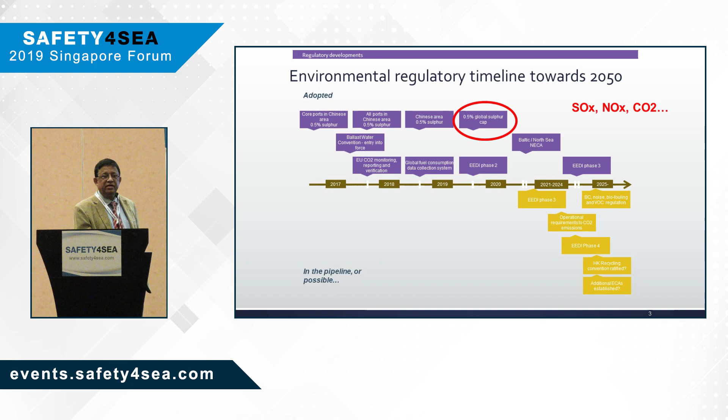So this is the timeline for basically three emissions: SOx, NOx, and CO2. For 2020, let me touch on that. The fuel options we have are basically high sulfur fuel oil with scrubber, or MGO, MDO, or alternative fuels, right?

Each of them has pros and cons. Nothing is really problem-free; one way or other, you have a problem. If you go for heavy fuel oil, even compliant fuel, availability is one thing, and quality would be another. And the price of low sulfur fuel could be pretty high, though it's anyone's guess.

A lot of rumor is going on. Scrubber availability is a question, and in the yard, I think they are fully booked more or less in China. And LNG, availability was a question mark, but it didn't fly because the retrofit option is not very lucrative.

So how does it look? LNG is not very attractive because you have the existing tanks that will become redundant, and adding a new tank increases the weight of the ship. So it didn't fly. But looking forward, by 2030 LNG will most likely come in and really capture the market, especially with new builds, slowly replacing the old ones.

The funny thing is, as you see in the graph, the demand for high sulfur fuel will drop, but it will most likely inch back up because a lot of people are still hesitating whether to go for a scrubber, but they eventually will.

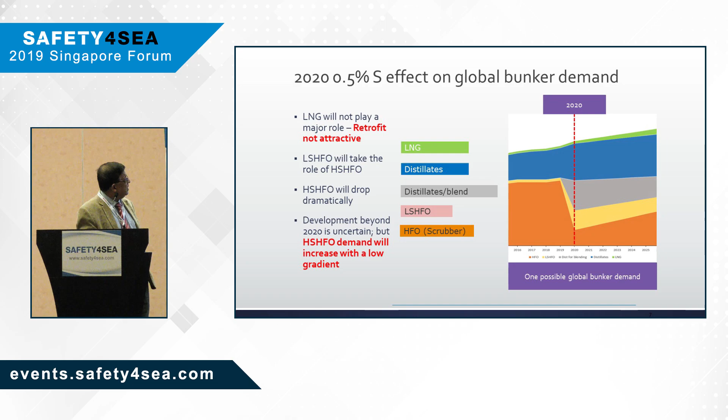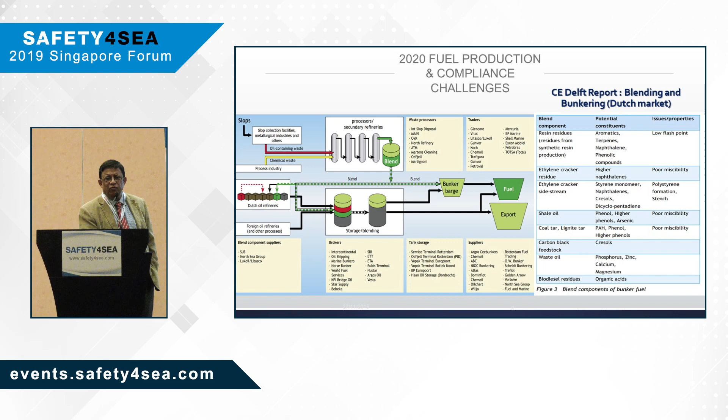Problem with low sulfur fuel will be the cutter stock, used to lower viscosity and sulfur content—that causes problems. This is from the Delft report; it says where the cutter stock comes from, and the most dangerous one is chemical waste coming from industry.

So refiners will be supplying this low sulfur fuel, and so will traders. Refiners do it by hydrotreating or blending, and that quality will most likely be all right. But the one you buy from the trader, you need to watch out for, because the blending may not be perfect. So you really have to watch out.

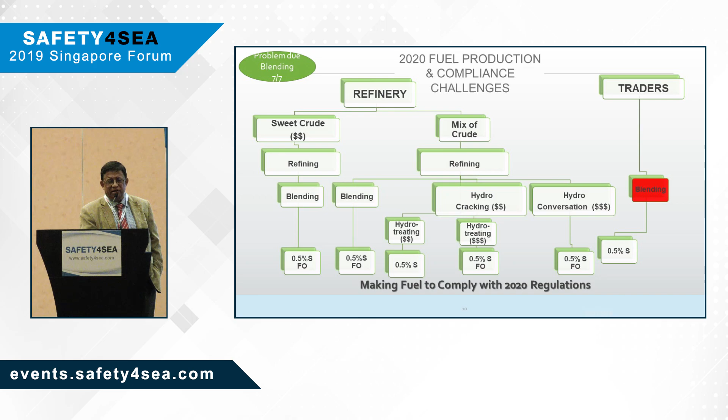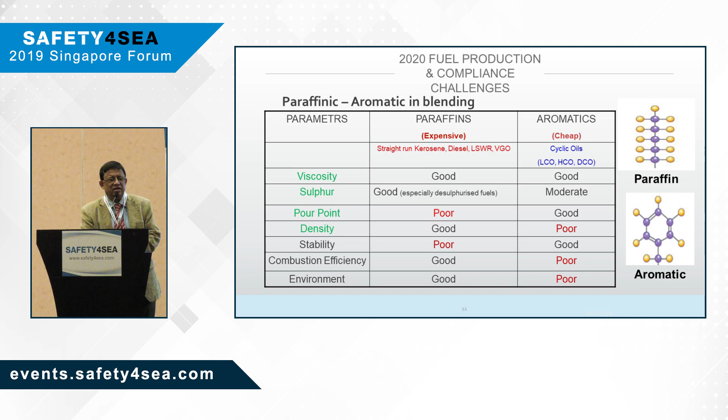There will be predominantly paraffinic-based or aromatic-based fuel coming in, and that will tell you what sort of fuel you're getting and how you need to prepare for it. This is a bit different from what you have right now—it's a very homogeneous fuel, right?

The publicly available specification came in from ISO. Basically it's a guideline, there's no standard. They warn you about compatibility—that means when you mix the fuel, stability can cause it to separate by itself, and there's viscosity. These are the concerns.

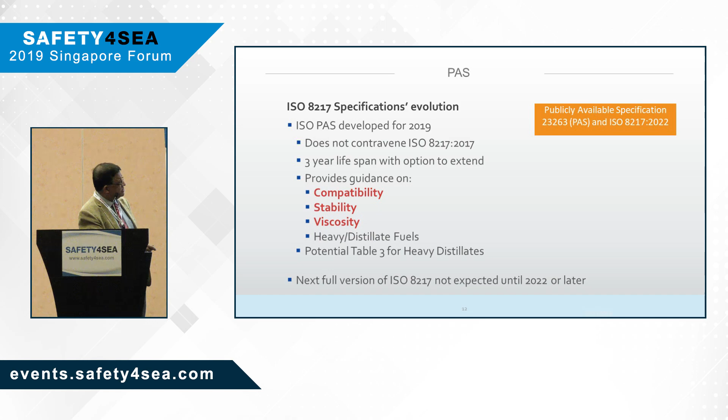So far we have seen some areas of concern with certain things: some cat fines, some pour points, and all this.

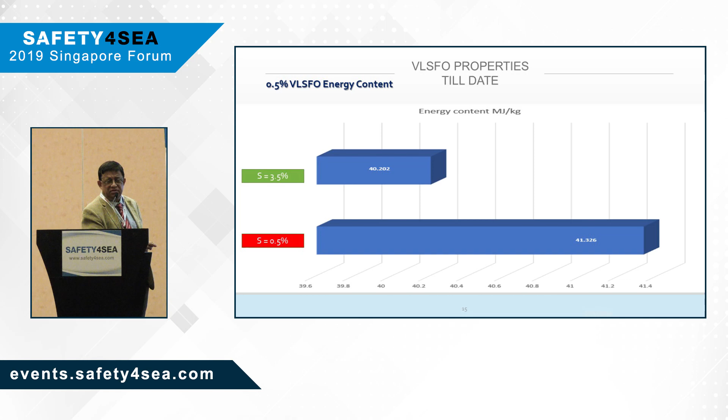The good thing is low sulfur actually means more hydrocarbon—you get more energy, more megajoules per kilogram of fuel. But then again, there are concerns about compatibility, stability, and viscosity. Main engine and auxiliary engine will all be affected because of combustibility of this kind of fuel, whether paraffinic or aromatic, due to viscosity. And lubrication is another thing to watch out for.

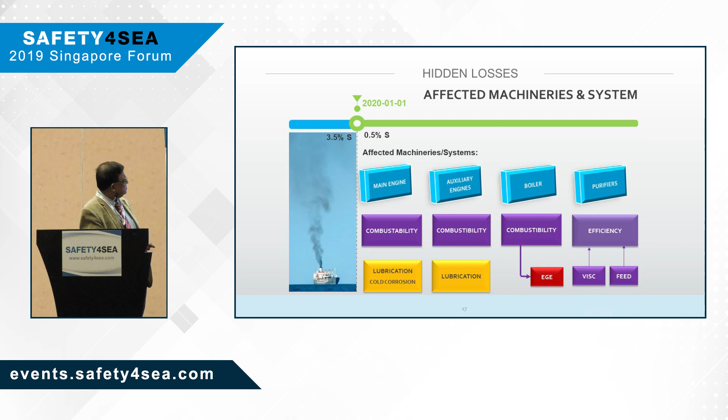So in summary: main engine and auxiliary engine will have combustibility problems because the viscosity is too low, affecting penetration and atomization. That means there will be a lot of hidden losses—you'll see fuel consumption go up. There will be a lot of leakage from the plunger and barrel because of low viscosity, and that will contribute to increased consumption.

But the good thing, again, is that sulfur content will be low and hydrocarbon will be more, so you have higher energy content. So it's a mix of good and bad for 2020 fuel.

Another issue: if you don't need to heat the fuel oil because the viscosity is too low, then what are you going to do with the exhaust gas economizer? It becomes redundant. How are you going to dump the live steam? Some say they'll dump it to the drain cooler—please don't do that, it will simply bloat the drain cooler. It's not meant for that, right?

The point is, all engines have been designed for high viscosity fuel, and the injection viscosity is supposed to be maintained between 12 to 18 CST. But if the viscosity of the fuel you're getting is around 8, 10, or 15 CST—there's no lower cap on the CST—are you going to change the injector nozzles or the fuel pump plunger and barrel? You could, but the next batch of fuel could again be higher viscosity, and again you'd have to heat it up to bring down the injection viscosity.

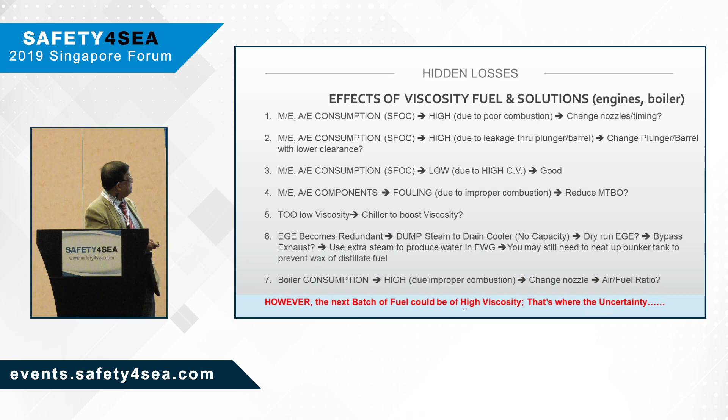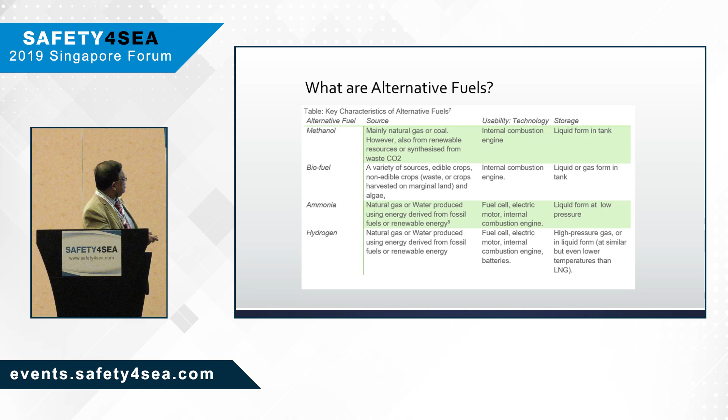Alternative fuel—many alternative fuels, many platforms you've heard about. But these are the common ones you hear of: LNG, LPG, methanol, biofuel, hydrogen, and technology-wise, battery, fuel cells, and many others, right?

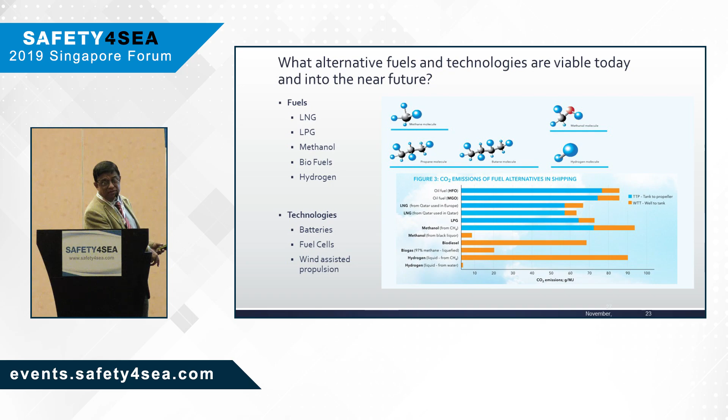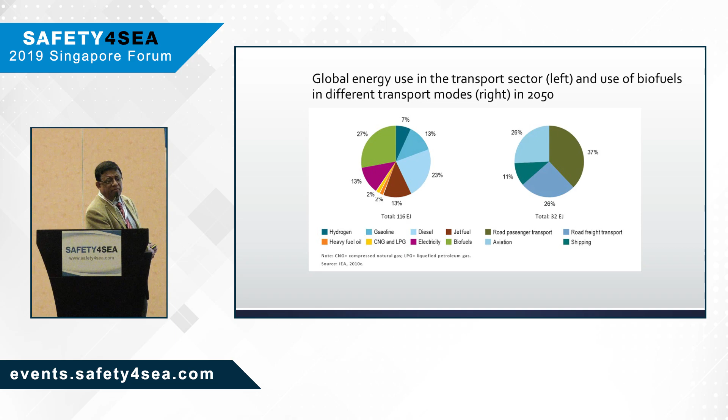So what we see is that right up to 2050, on the left-hand side you see the transport sector, and on the right-hand side the biofuel, how it's going to come into marine—what percentage is not so much. What was predicted, that by 2030 a third of the fuel would be biofuel, is not going to happen. It's pretty expensive.

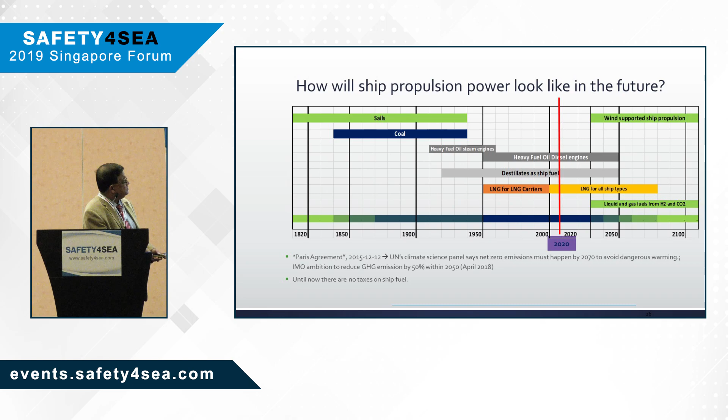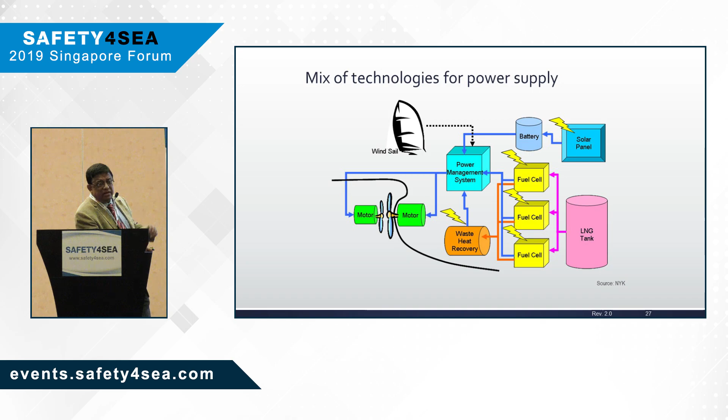And then it will be sort of a combined thing. It will most likely be like solar panel going through the battery or power management, LNG reform going through the fuel cell, and then again wind sail will come in, and waste heat recovery, whatever you can, will be optimized further. That combined thing will most likely be driving the future.

So to summarize, if you use diesel oil, that means diesel engine, not really diesel. With heavy fuel oil, you have to use the scrubber to satisfy SOx. And if you go for EGR or SCR, then you satisfy NOx. That's how the matrix is to be read. So you see the diesel cycle, otto cycle, and COGES pattern comes in, and then how you satisfy what sort of regulation, is it future ready or not.

One thing to highlight is that right now if you use LNG for the otto cycle, you are looking at some kind of methane slip, which is again not really a welcome thing. But then if you go for COGES, you don't have that methane slip.

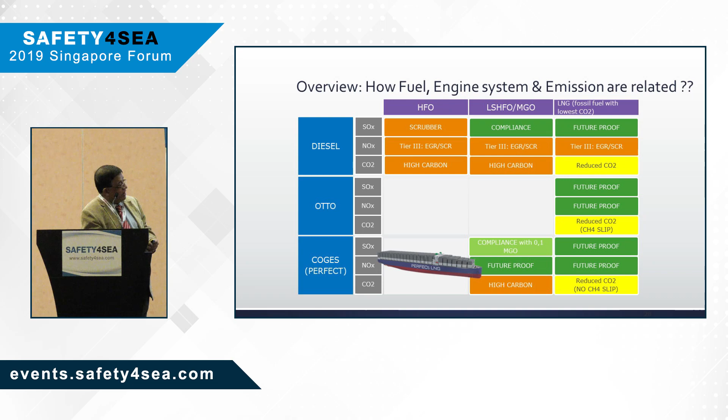And the concerns for fuel would be these: always the case, availability, price, sustainability, and practical application on ship.

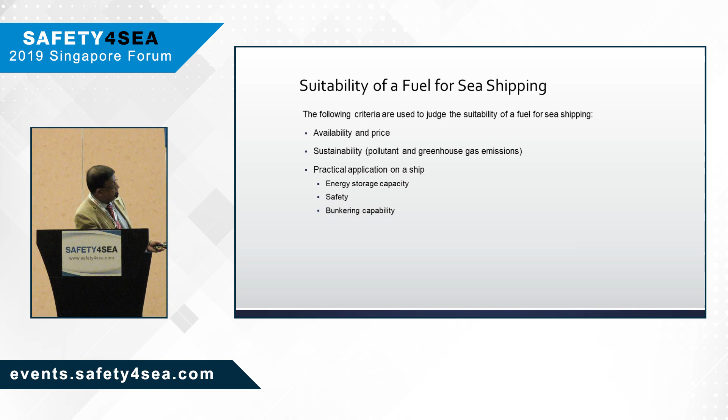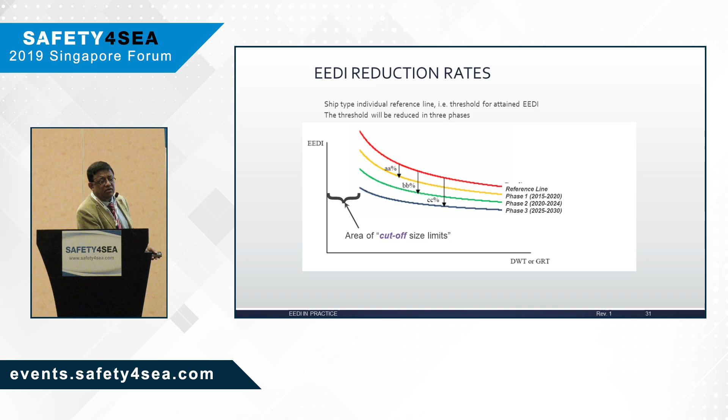Energy efficiency, EEDI, all of us know about the EEDI. Year after year it's going down and down, and it's expected to go down further. And then how do you make use of that EEDI and EEOI? This MAC curve is the marginal abatement cost curve, which basically tells you what sort of initiative you can take to reduce the EEDI and EEOI.

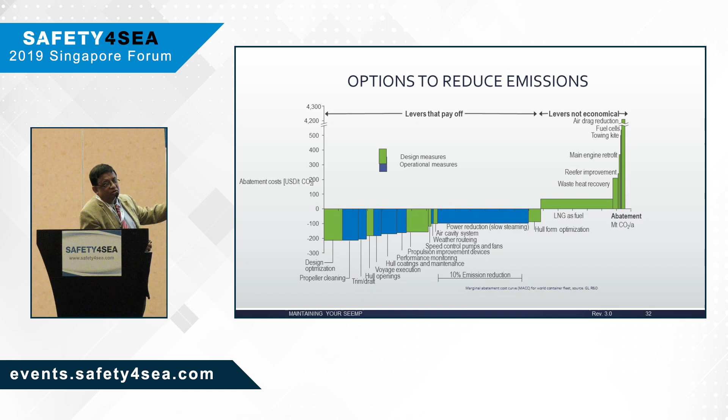The color difference tells you that, for example hull opening and all, is part of the EEDI kind of thing because you have to do it during a new build. And the other color is operation-wise, that means slow steaming and stuff like that.

So we see this wave of energy efficiency drives. There are a lot of initiatives coming up with EEDI and EEOI. Slow steaming, for example, is part of EEOI, the operational behavior. Trim optimization is again part of EEOI, but hull optimization is on the EEDI side. It's a mix of all these things, wave after wave, first wave, second wave, third wave, fourth wave.

The last one we believe is the fifth wave, which is crew behavior. That contributes a lot too. You can have many initiatives, but if the crew doesn't take interest in reducing fuel consumption and emissions, then it all goes in vain. Especially for trim optimization or slow steaming, the crew has to be there, and also things like carrying less ballast.

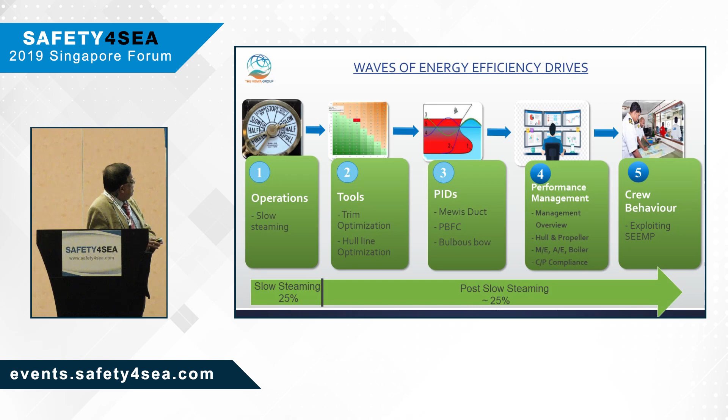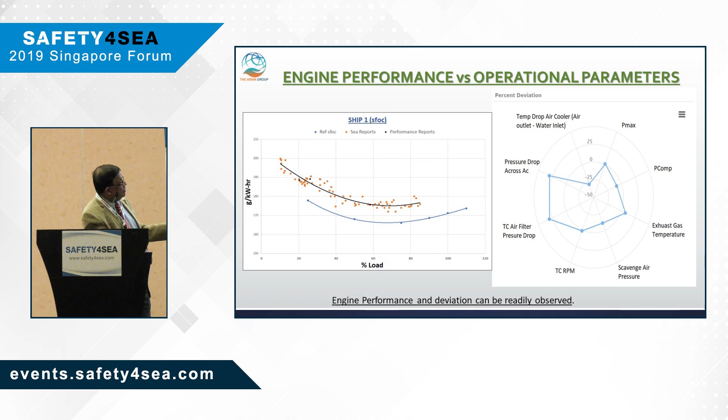So some of these performance metrics like EEOI, how do you monitor that? You go by specific fuel consumption and look at the operational parameters and all. Hull cleaning is another one. But at the end of the day, we're looking at how much it really contributes.

We must have a long-term strategy. We know 2020 is one milestone, but the next one we're looking at is 2050. We have to bring down CO2 emissions by 50% from 2008 levels, and that's a big question mark — what are you going to do about that? Short term and long term, you can have different kinds of strategy in order to achieve that.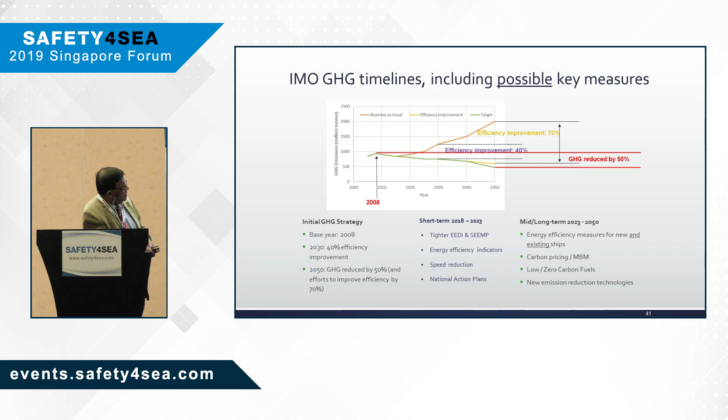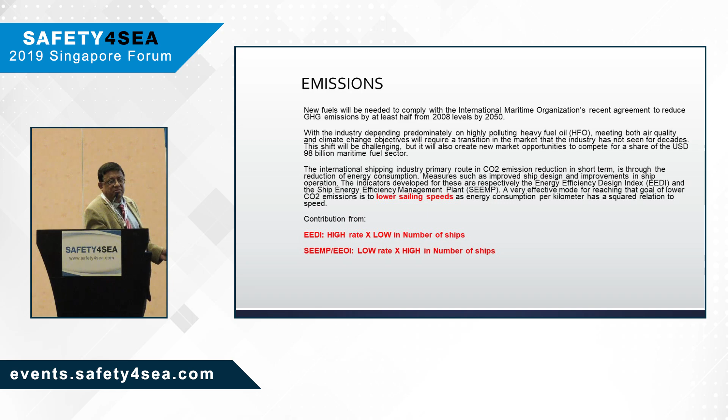At the end of the day, I'd say the contribution from SEEMP and EEDI — there's a lot of publication on that — but SEEMP, Ship Energy Efficiency Management Plan, with EEOI, will contribute more because the number of ships in question is a lot, though the saving per ship is very little. It's a product of two things: EEDI gives high rate of saving but for a low number of ships, while the other has a huge number of ships but maybe less saving each.

At the end of the day, no matter what incremental thing you do, most likely it will be slow steaming — one way or another it has to come in, because of the exponential relationship. That is the biggest saving in emissions I think we can have.